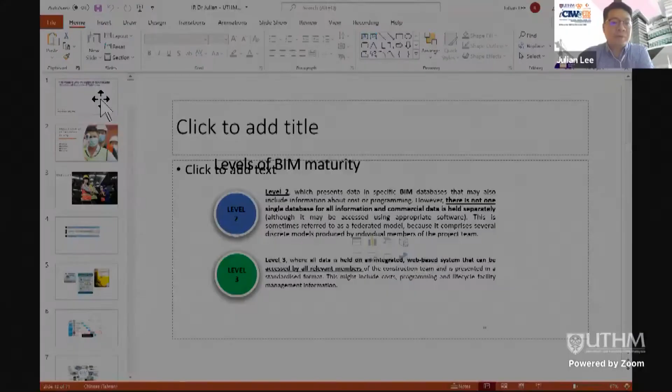Yes, yep. So I'm Julian, from New Zealand, Hong Kong, everywhere. So I'm actually quite keen on using BIM.

For my first project, not surprising you guys, my first project using BIM is in Africa. At that time I worked together with a mainland China contractor who already had the idea of using this digital thing, a 3D model, to model the building, the basement, and the E&M pipeline. But at that time I wasn't really keen because I saw a lot of things were quite simple, not mature enough. I still think at that time it was a gimmick to tell the client to give us more consultant fee. But at the end of the day, that's not the fact.

Before that, we punched through one horizontal pipe and then had to go cut an existing foundation. So you can see these digital tools can help you have a better understanding of what you are doing on site. And also all the data, all the information, can be in a centralized platform that, during the whole construction process, you can share with different stakeholders and every partner, every people can easily access the information.

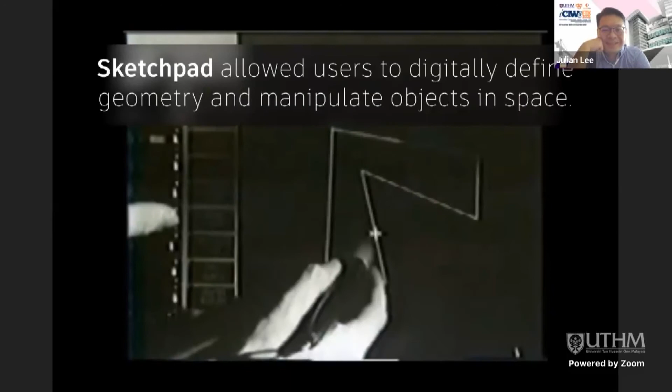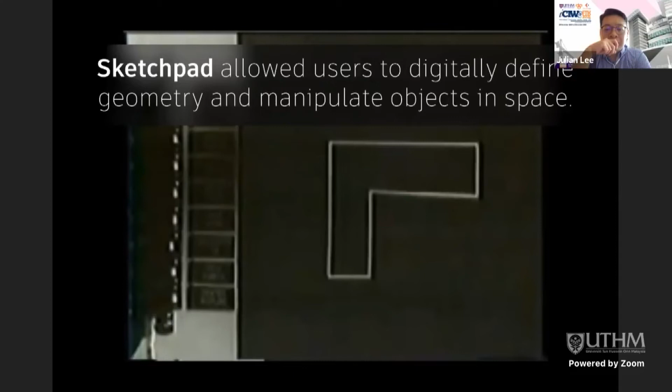The breakthrough came in 1963 when Ivan Sutherland developed Sketchpad. This rudimentary application allowed users to define geometry and manipulate objects in space with only the help of an electronic stylus on a computer screen. However, these early predecessors built models without data on functional performance characteristics, meaning that without information on how buildings work, they were rather superficial implementations.

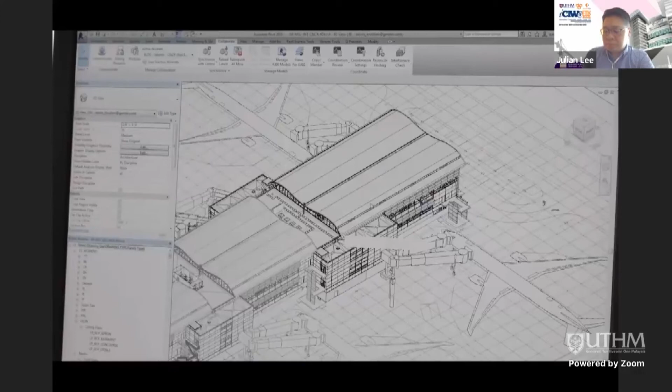In 1984, these BIM forerunners became available for use on personal computers, but it wasn't until 1986, when Robert Aish coined the phrase building modeling, that early programs were first used on large and complex projects, such as the renovation of a Heathrow Airport terminal. In 1993, the Lawrence Berkeley National Labs' development of Building Design Advisor paved the way for systems providing performance data on how buildings and their components function.

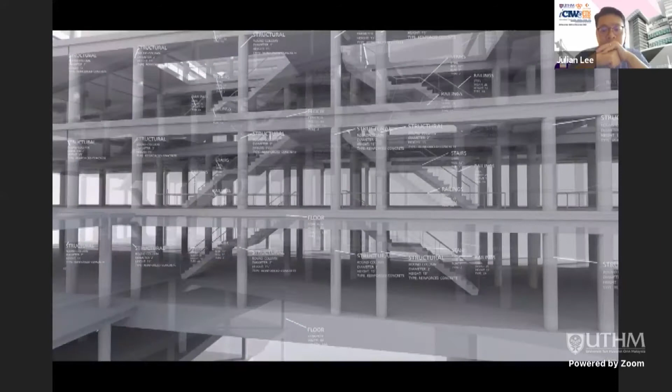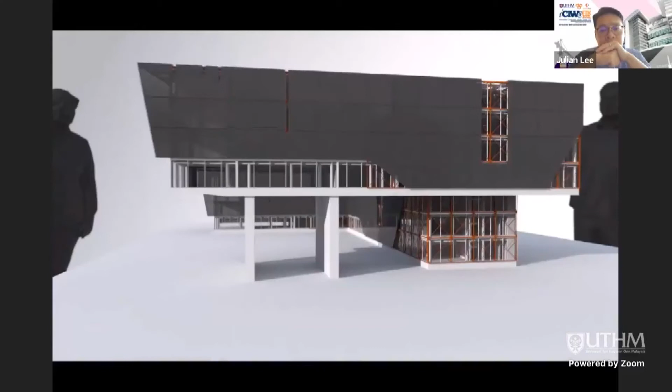By the late 1990s and early 2000s, the contemporary outline of BIM had started to crystallize. Objects and shapes had fully embedded metadata and were able to understand their relationship with each other and the building as a whole. 2004 was a huge year for BIM - for the first time, designers, builders, engineers, and owners could all work collaboratively on one centralized, dynamically updated model. For example, if a designer made a change to the model, the project's construction shopping list automatically changed too, such as the number and size of windows.

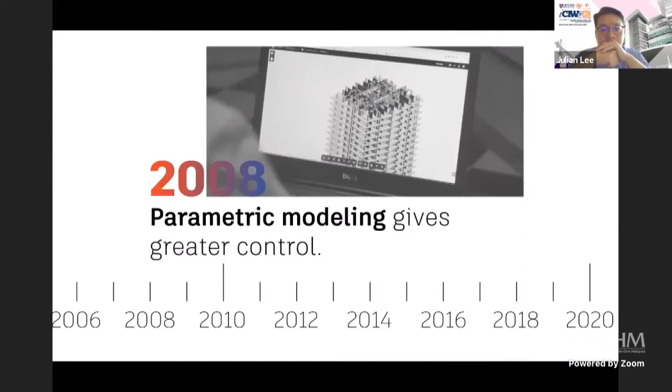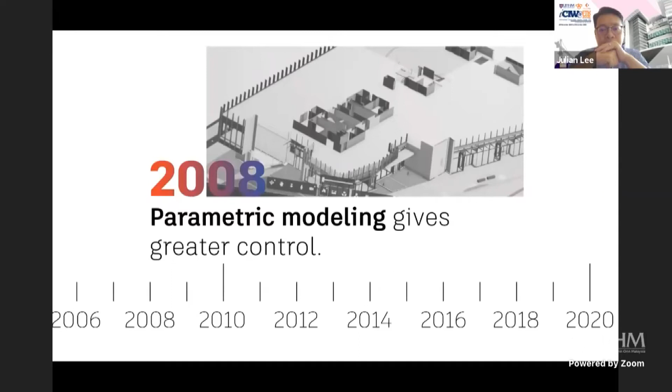2008, four years later, parametric modeling also took a step forward, with an avalanche of design outputs giving users even greater control over their project decisions. Meanwhile, laser scanning and reality capture filled BIM models with precise, abundant data, saving time in project preparations, and clash detection made it possible to automatically locate on-site clashes, such as ductwork running through beams, and prevent expensive change orders.

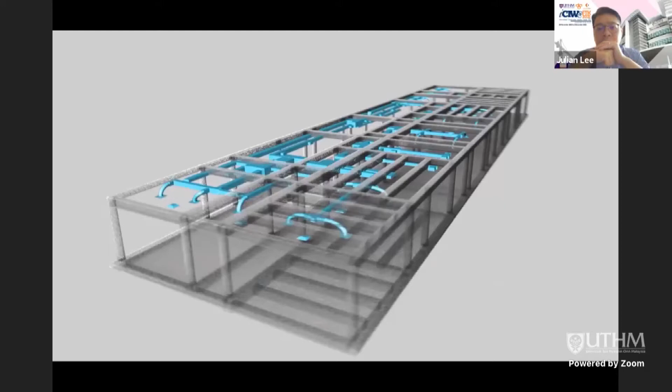With help from clash detection, engineers for the China Zun Tower in Beijing caught thousands of issues in the BIM model, reducing passive change orders by 80% compared to other similar projects. The indisputable efficiencies in time, material, and cost driven by BIM meant that in 2016, the UK became the leader in legally mandating that all public-funded building projects must use BIM. Other countries are soon following suit - by 2020, Germany is mandating BIM for all transportation projects.

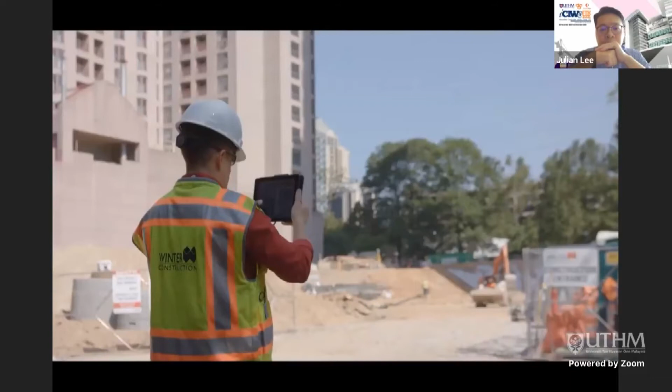With BIM now in the cloud, teams can collaborate on the same model from all over the world, providing great efficiencies. In the near future, BIM and GIS data will merge into one model, helping designers make crucial decisions based on precise geographic location. As 3D modeling technology advances and is more commercially accessible, the BIM process is becoming more and more integrated with building the wider world, promising a richer, more collaborative experience for users designing and building the spaces we live and work in.

So this is the video that I always share when I talk about BIM - I'll spend one to two minutes to show it to the audience, because it basically tells you what BIM is and how it can help us, and the life cycle process throughout the whole building or infrastructure, from the design stage until the demolition stage, that BIM can be involved in.

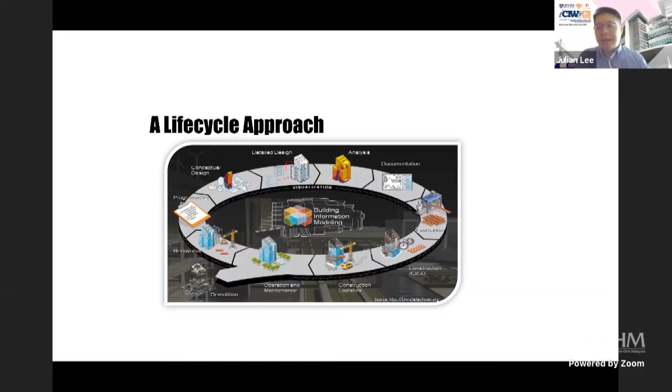BIM is not only for design - it's not only for playing around with the computer model in the design stage, but it can help us throughout the whole process, even in fabrication, construction, cost planning, facility management, and demolition at the end. So the whole process BIM can be involved in. This is one of the projects I worked on in Hong Kong at that time.

It's a tunneling project, so you can see the right-hand side is actually what we are doing on site. We have excavation, tower crane, excavator, we have everything on site. Then we try to do the BIM modeling by putting all the stuff inside the computer model. We also have RFID and real-time monitoring tools on site to know the exact location of the excavator, to know exactly what the construction activities are, and then we can plan ahead.

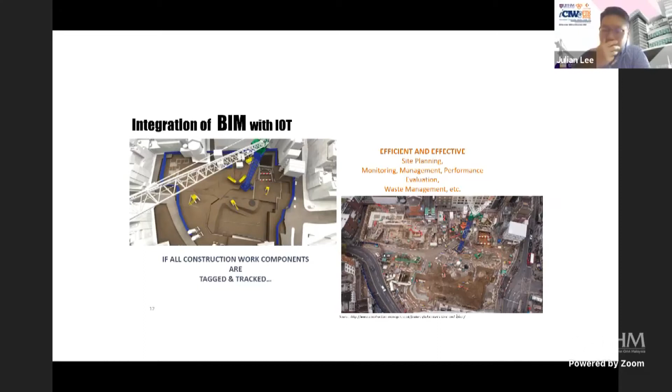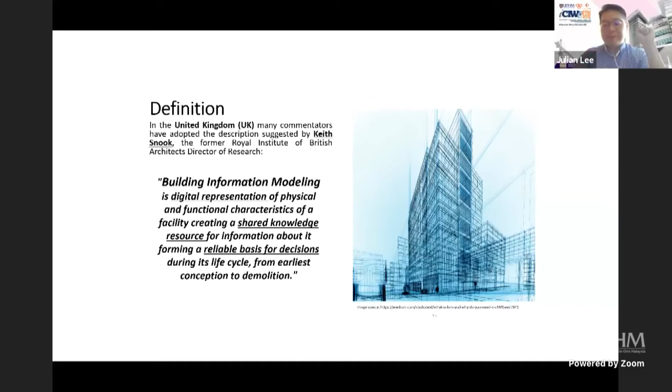By the definition in UK, basically as I mentioned, BIM, everyone thinks building, but we try to make it more generic in the global perspective, since different countries have different corporate practice, to make it clearer to people what BIM is. So basically BIM, by this UK definition I like, is a digital representation of a physical and functional characteristic of a facility, creating a shared knowledge resource. The information about it will form a reliable basis for decision making during the whole life cycle, from earliest concept to demolition. So this summarizes that BIM is not only for design, but throughout the whole life cycle process. It's a sharing platform, a digital representation of a physical matter.

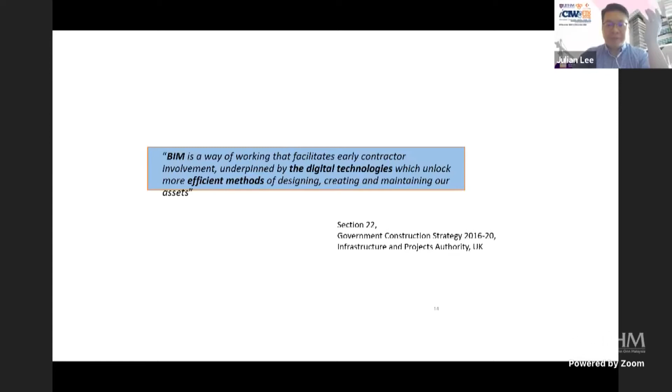Some of the UK and overseas strategy or policy reports keep saying that using BIM can improve our efficiency and productivity. And the information needs to be shared. You cannot just do BIM in your cave. You cannot just tell people, hey, today I am doing BIM in my lab and I don't share the information with other people. Then this is not BIM.

BIM is about sharing information, but the sharing of information is a bit complicated, because in a construction project you have a lot of different people - architect, MEP engineer, C&S engineer, contractor. How can I share my information with other people so easily? So we need a platform, something in the cloud, a common database where people can store all the information.

But you can imagine that if all the information comes in, just like what you're doing in Google now - wow, a lot of information, which one is the correct one, which one can you make use of. Sometimes it's very confusing, right? So right now we're also setting some game rules about who should be the one to put in the information for that particular discipline, and who should have the authority to amend and approve the information for others to make use of. So we need to set up these game rules in the BIM process to make sure no one can just easily come in and stir the whole thing up and mess up the information.

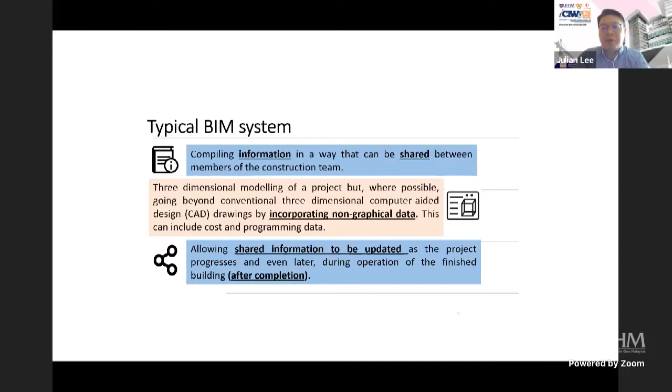If you want to have a successful BIM project, you have to set the rules in such a way that people won't easily destroy everything in your system. A lot of qualification is needed at the project level, the company level, the personnel level - we have a lot of different accreditations. Just like myself, I am a chartered engineer, the UK civil engineering institution accredits myself as a chartered engineer, and the New Zealand professional engineer board also accredits myself as a PE there.

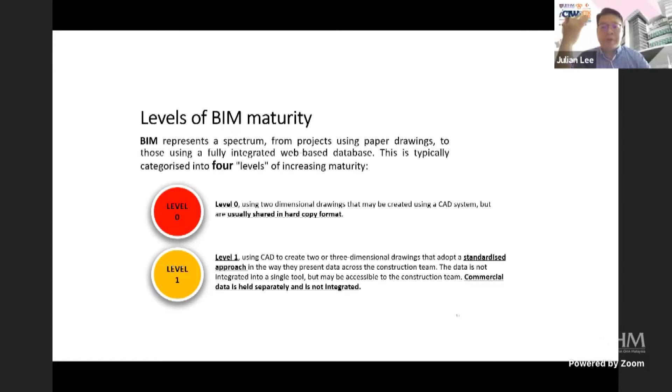So BIM also has different accredited systems to benchmark the project, whether it's level 0, level 1, level 2, level 3, and they have different thresholds and criteria. I'm very happy that in Hong Kong, when I worked at the Construction Industry Council, we established a qualification called BIM Manager and BIM Coordinator for projects, which means that for public works projects, government projects, if you actually want to get involved, you have to be accredited with the qualification by CIC Hong Kong as a BIM Manager or BIM Coordinator.

To some extent, it's a very good opportunity for young people to set a target - when you want to come into the BIM industry, it's just like when I came into the engineering industry, my ultimate goal was to become a chartered engineer, right? So if you come into the BIM industry, you can become a BIM manager or BIM coordinator, accredited by different authorities. In Malaysia, I'm quite sure CIDB is doing similar things to promote BIM by putting in those qualifications. And as I mentioned, BIM level 1, 2, 3 - at each level in the project, there should be a certain amount of different BIM managers and BIM coordinators inside that level.

So all things are tied together. If you don't have the BIM manager, the BIM coordinator - I mean the people - how can you claim that your project is BIM level 2 or level 3, right?

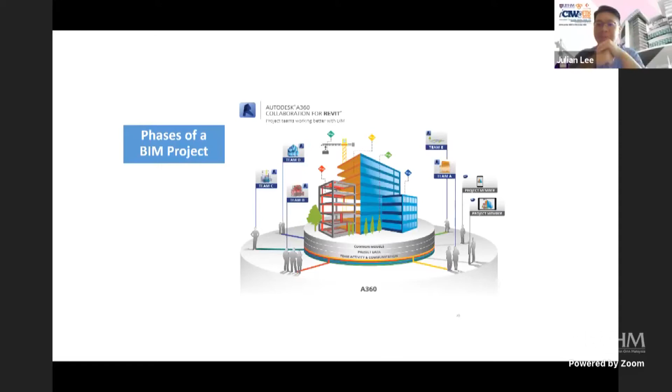So I keep telling my friends at the uni, basically don't worry about the software, just teach the fundamentals. When people come into the industry, they will have a lot of different software that they can make use of. And AI, all these things, like the video also mentioned.

Analysis things that we can have different options by using BIM, by using analytical tools that can do a parametric study and give you a lot of options.

I've been involved in a lot of different deep excavation works. And in deep excavation, sometimes the shoring and the level, all this thing is a mess on site - we keep changing. And the platform, temporary platform, how we put the excavator on top of the platform, all this location. AI can help already. AI can already help us give a lot of different options, and by putting it into the BIM, before we really excavate, we already understand which should be the best option that we can make use of.

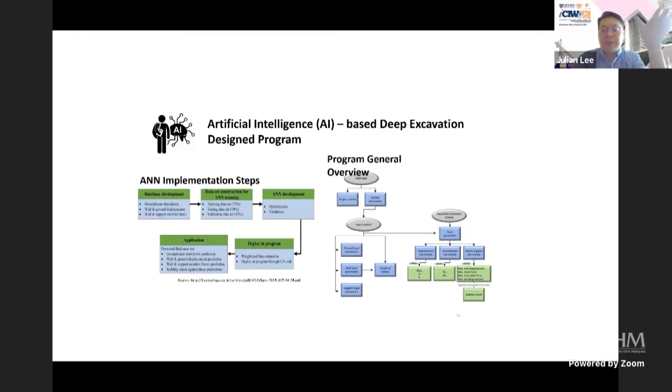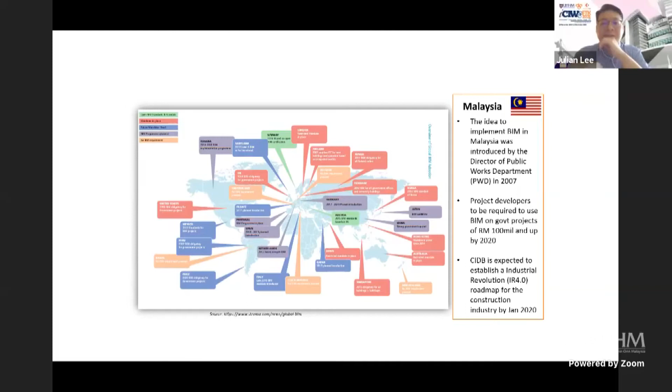And in New Zealand, when I started my business there, I invited my good friend from Stanford, Dr. Calvin, to come over and tell the Kiwis how this BIM scoring concept can help them benchmark themselves in BIM capability.

Dr. Kam also mentioned the common IFC file format, because different models from Revit, Bentley, ArchiCAD and other things - how we convert the whole thing into a common platform that everyone can easily make use of as shared information. Some of the hurdles I can see using BIM with different software vendors is the format is not tidy, so we cannot easily transfer the information. Just like if you have a PDF file, how you can transfer it into a Word file - similar to these things.

If you get into the BIM industry, you have to understand that everything needs to be shared with people. It's a shared platform. I cannot just do something that only my group of people know. I need to make sure that other groups can make use of my information.

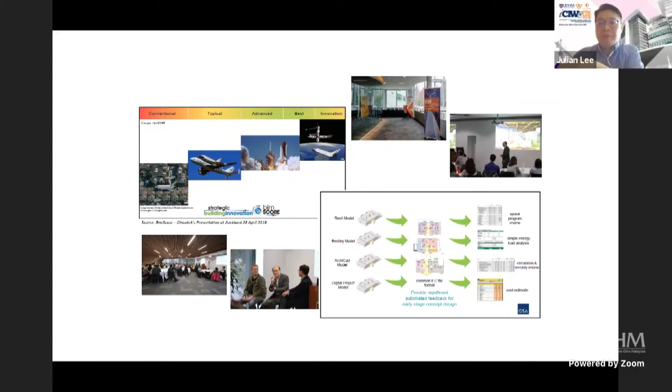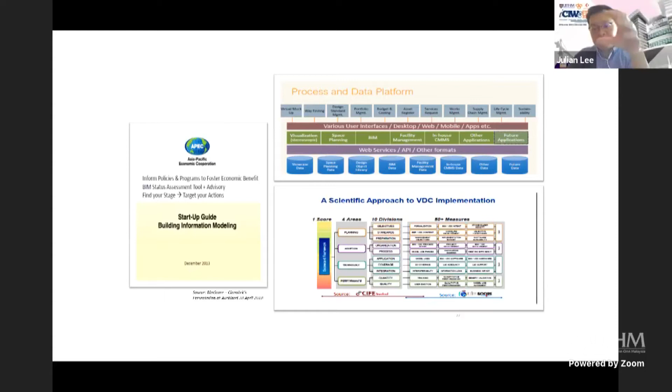The BIM score benchmarks different projects, different countries, and they develop guidelines on how we can go from BIM to virtual design construction. Different governments like UK, like Hong Kong, do a lot of awareness surveys. I have some feeling Malaysia is doing something similar, looking at their BIM competency level and the awareness level of different industry players, whether they know BIM should be the way. I'm quite sure CIDB, my BIM center friend, they're doing the same things.

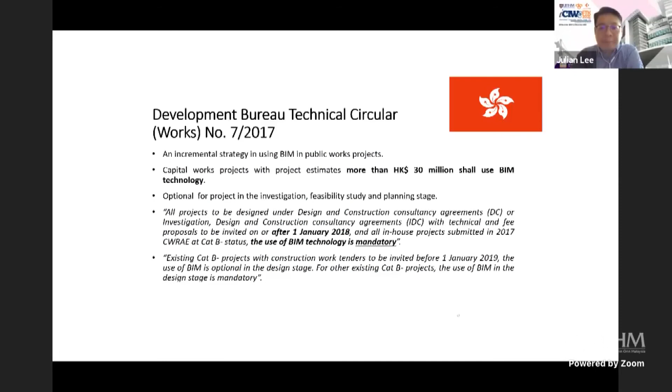Going back a few years ago, when I went back to Hong Kong and saw this policy address, the government policy address, I was very happy because they mentioned quite explicitly that in projects we need BIM, and there's money to support BIM application. For each project, if you use BIM and those digital methods to improve productivity, you can get some funding from the government.

So you can see top-down is one method and bottom-up is another method. I won't say only top-down can make a successful story for BIM. It should be a combination of top-down and bottom-up.

Bottom-up is just like what the university is doing. You train up the BIM people, you train up good students for us so that in the industry they're equipped with the knowledge. Then when the top-down money and projects come, we have the supply from the university, the students coming in, and then we can make the momentum. Imagine if I only have money and don't have people, how can I do it?

The pandemic made me rethink one thing, because in the old days, people could travel so easily and digital information was also so easy to share. So quite often I had my drafter, my BIM modeler in the Philippines, mainland China, in Malaysia, helping me on a project in the UK, perhaps. Easy, right? But now, because it's so difficult to travel around, using video conferencing is still manageable.

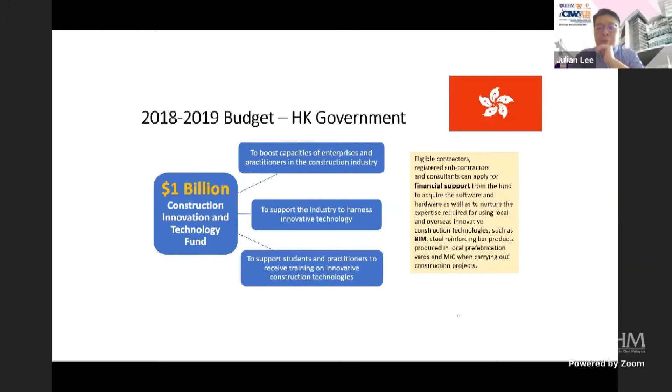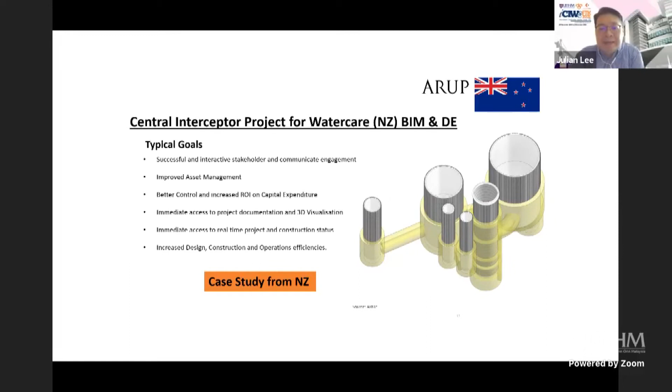So this is some of my New Zealand project, when I worked with Arup doing BIM models by adopting some English project methods. They also mentioned the whole thing - data analysis, design, documentation, and visualization - and how the whole thing ties together.

I don't want to go too deep here because I know students may not understand this whole process. But just to give you a basic understanding: doing BIM is not only playing around with the software. It's data, documentation, analysis process. It's the process knowledge that you have to equip yourself with.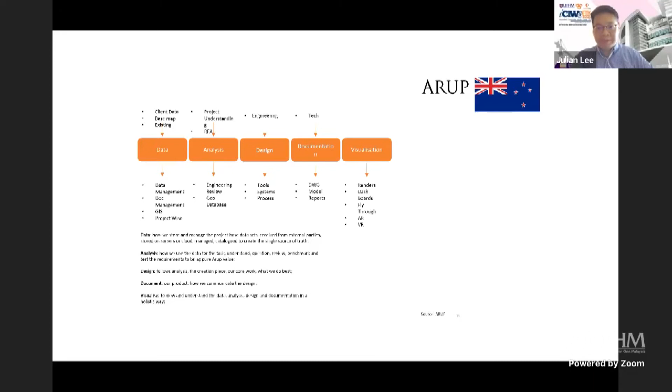Clash detection is how you make sure, by using BIM, that the clashes that we quite often encounter on the construction site can be avoided. We try to use BIM to reduce the chance of having all those clashes.

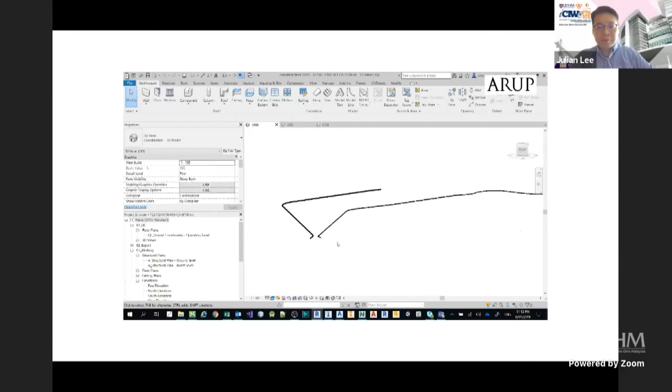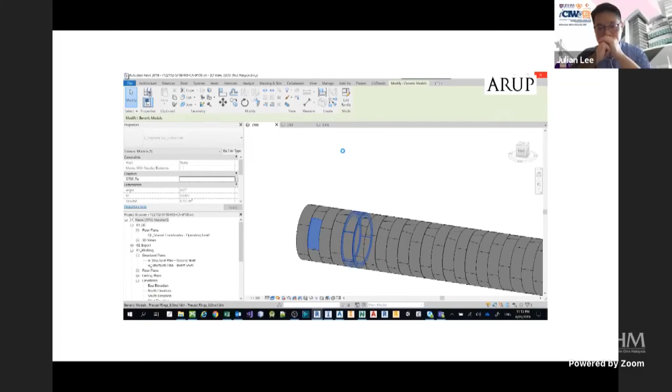So again, I'll show some video for you on the tunnel segment, using the BIM Revit tool. It's easy to use BIM in the analysis to help you formulate your design. The main purpose is to make ourselves have a more effective way to do the design.

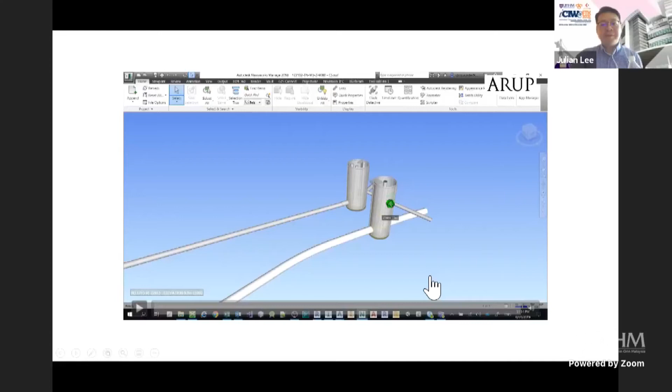This one is interesting, because we can also tie the whole thing with the GIS model, and also look at different programs and the timing.

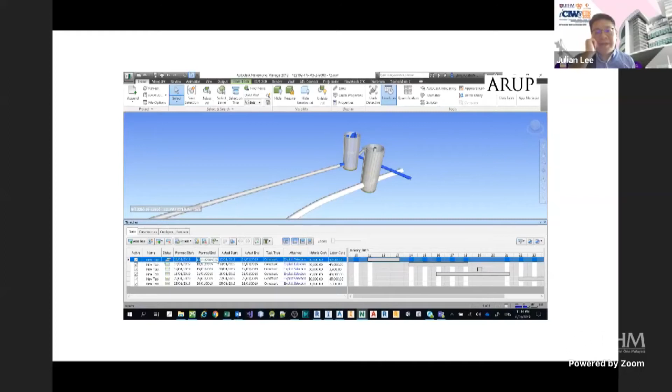So don't only think that BIM is something for architects only, or something for engineers only. It's also something for quantity surveyors. They look at the whole process, and can easily calculate the quantity and monitor the construction timing.

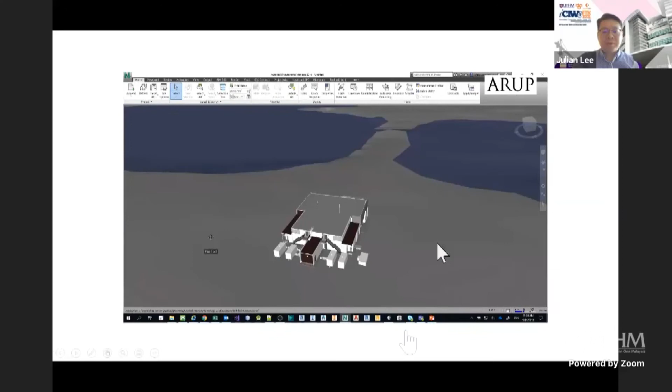And also this ties with geographical information, so you understand, okay, if I have this pipeline coming over here, what is the impact to the existing pipeline in the city?

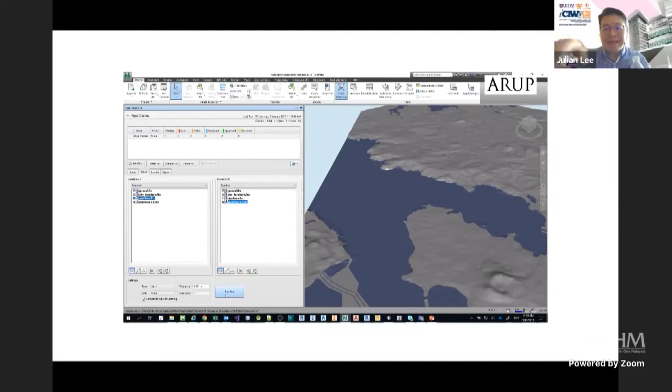It comes to another big concern: who should be the one that owns this information? Government, consultant, contractor, or who should be the one? It's a very big debate how these things can be properly managed.

Just like in this pandemic time, who should be the one that can manage the information for every single person that comes into your country, comes into my country - it's quite a big argument, right?

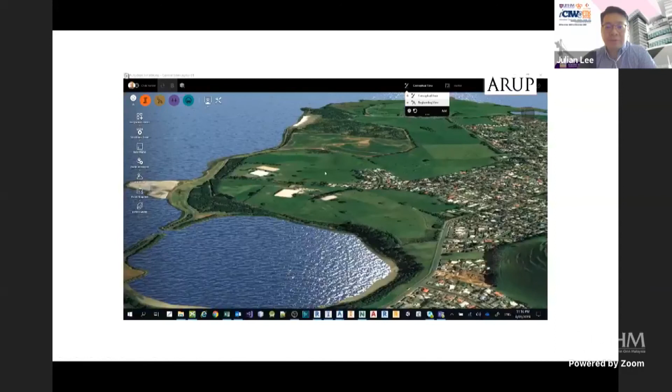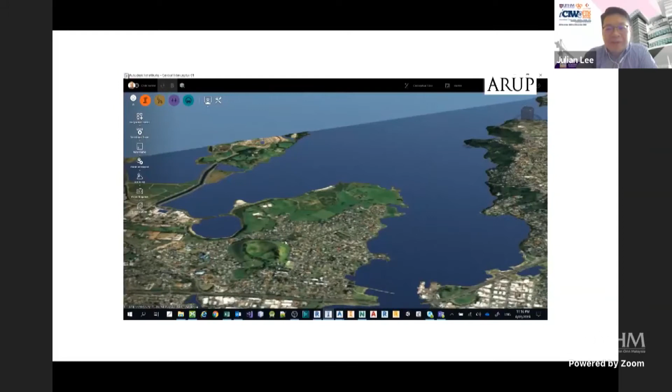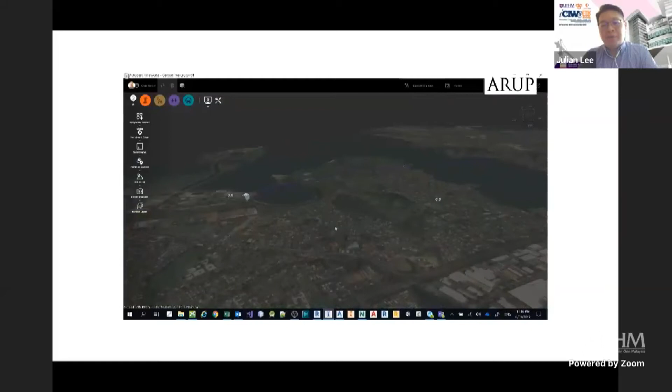This is Auckland. So if you guys are interested in coming to Auckland, you can see all these nice places. I live in one of the condos here. So when we build up a new project, we can easily tie the BIM model with this existing information, and we can see how those things are tied with the existing building, landscape, all those things.

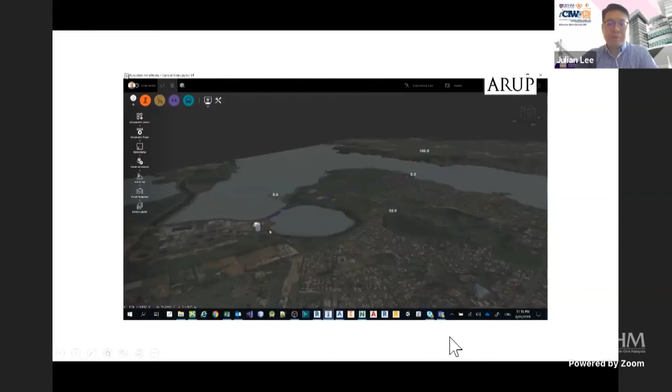Sorry. You just mentioned who will own the data, is it? Is it the consultant, or is it the government?

Yeah, so in this kind of case, it's always very controversial. So normally, how do you all deal with it?

I would say at the end of the day, whoever is the client should be the one who owns the data. If the client is from government, it should be the government. But for private development, if we talk about only a building, not actually tied with other things, that should be the developer itself. But if the whole thing is tied, for example, to an MRT station, and all the drainage things are tied back to the central drainage system, that should be the government and the developer.

But I always talk to the consultant - hey, I think at the end of the day, even though you are the one developing all these things, I don't really think you are the owner. You should be the one helping the owner, the client, to deal with the information. So you can't just use that information in your other project if you don't have permission from the client to allow you to use the data.

So this part is quite controversial, because I also talked to my professor friend from the law department in Hong Kong. He is also very keen on BIM. He also tells me it's very controversial who should be the one to make use of the information without any restriction.

Even government may have restrictions, because maybe the information is owned by the developer and the government together, but the data is stored in the government system. Whether the government can make use of the developer's information in their other developments, I don't think it's easy for them to get permission, unless the government sets up some rules that at the beginning, everyone coming in grants the access, grants the permission to make use of the information. So it's all about contractual relationship, all about the legal framework.

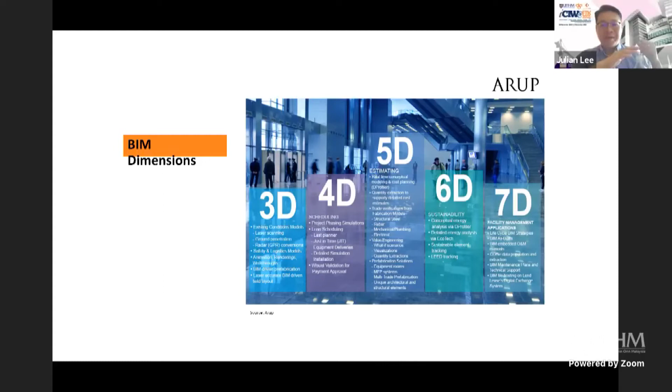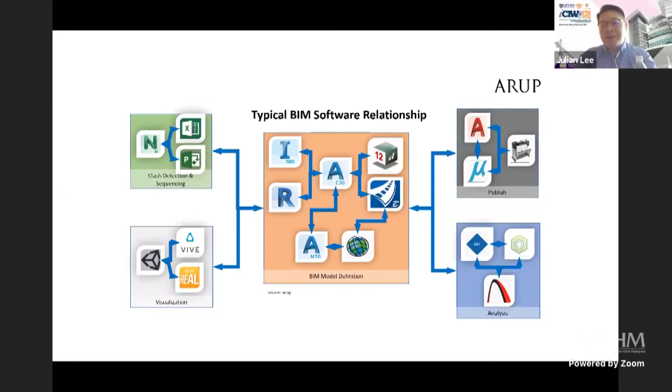So the 3D, 4D, even 7D, a lot of dimensions. I always say people keep saying a lot of dimensions, and that's okay - just tell people that BIM is actually about sharing information until construction, cost, time, and maintenance. That's all. So the solution software is how the whole thing ties together: visualization, clash detection, production of the document, analysis.

And my friend Chris from Arup, he actually quite likes to tie the whole thing with his mobile phone - okay, this is AR.

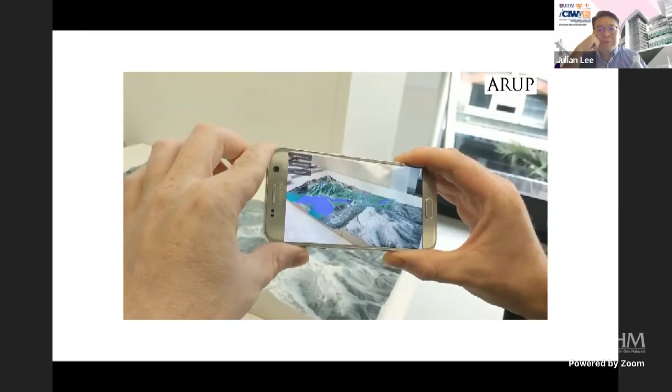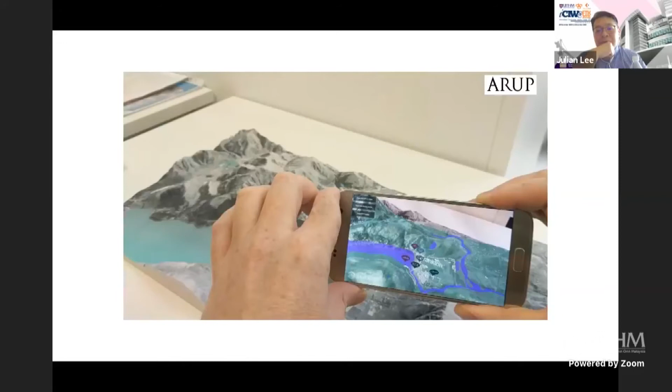Wow, I hope we've done this well. It's quite impressive - the first time I saw this was back in 2018. I just want to show how, as it rotates, the text and icons rotate with the view. My God, this is cool.

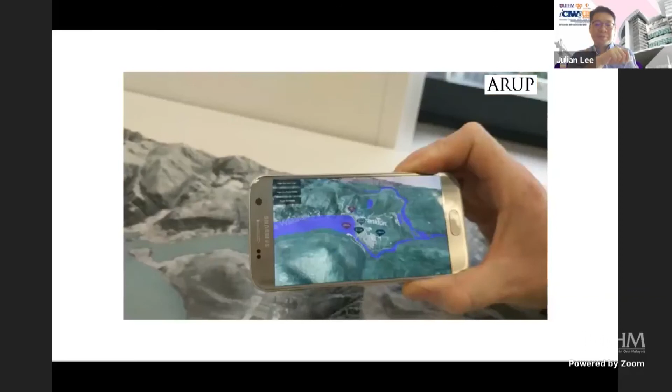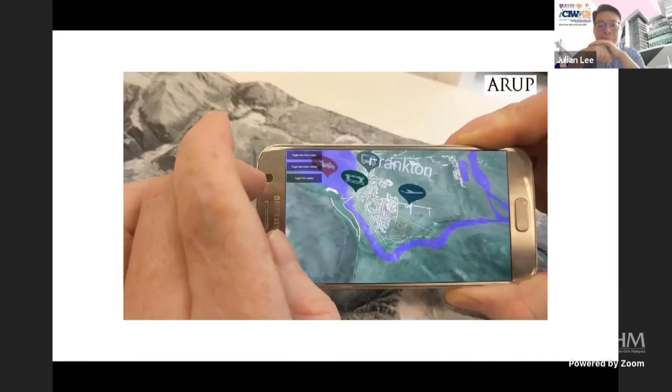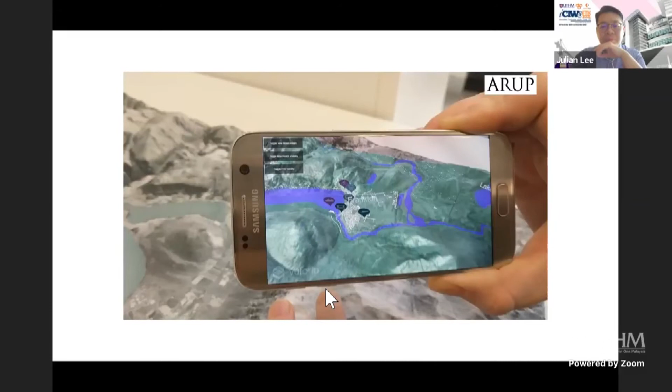Okay, now we're going to zoom into this area, and I'll show that when I toggle the button, it starts glowing. We can toggle that off again, switch areas on and off, and also switch the POIs on and off. As we move this around, it sticks with the model, and we can point at things.

So yeah, that's kind of all I wanted to record. Quite impressive, right?

So a lot of all this AR, VR, all things tied with BIM. And this gentleman right now is still in New Zealand - I had a short chat with him three weeks ago. He asked me when I can come back to New Zealand. I said, I really don't know, friend, but when the border opens, I will try to come back home.

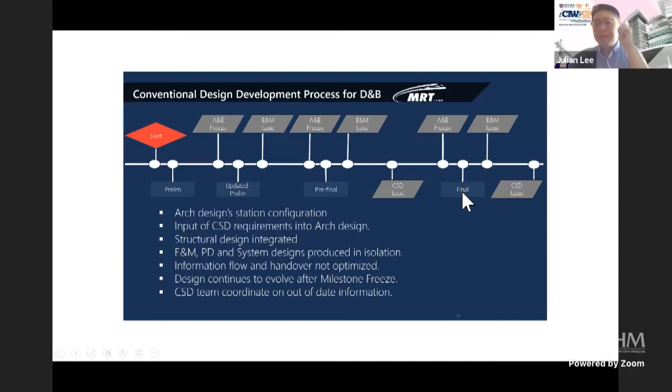So another good friend of mine doing MRT at that time also has very good process definitions. Using BIM, what is the difference with the conventional D&B contract? In the conventional D&B contract, you see a lot of milestones - the architectural layout has to be frozen, has to be visualized, from the prelim, update prelim, pre-final, until final, and the combined services drawing comes in. You have a lot of milestone days, right? Because if you don't achieve that milestone, how can you come to the other milestone?

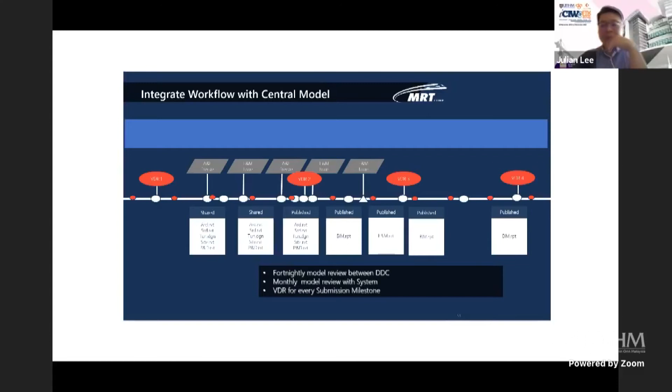But in the BIM process, the central model is actually a dynamic process where the whole design throughout the whole design process will be updated from time to time, and all the people are sharing the information together. So the VDR workshop is very crucial - all the people will be sitting together. The virtual design review workshop means everyone has to sit together to make sure the model is fine, the information is fine, then move to the next one. All these people are so happy to achieve level 2.

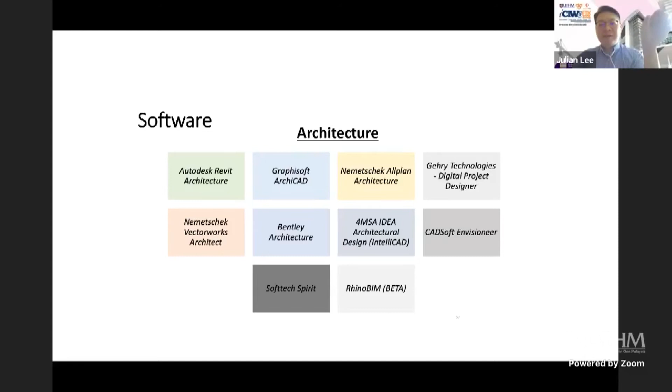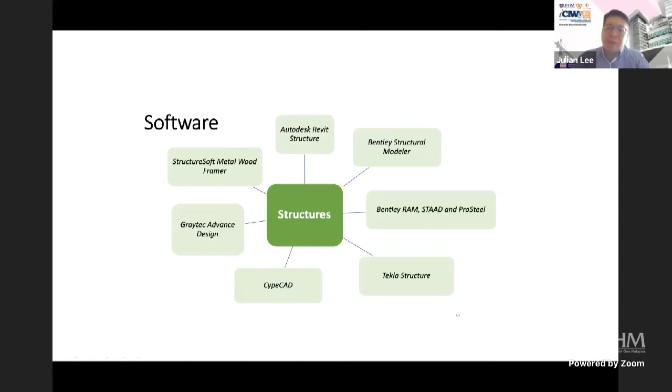Okay, because I'm a bit running out of time, I'll talk more about the software. As I mentioned, no worry, no need to study all this software. If you study all this software, I think you'd already spend 20 years. So don't feel so scared about whether you need to learn Tekla, Revit and Bentley all together. As I mentioned, no need - on the job training, you will equip yourself with the knowledge.

So I will say right now we have the opportunity, and we need to make ourselves clear that this is the future, the way the construction industry will be going ahead. We can't rely on the old style method because the demand, the effectiveness of the project, the target and the expectation of the project are much higher now. So we have to use digitalization - BIM should be the one.

But how we define the roles and responsibilities of different parties inside the BIM process - who should be the authorized user, who should be the one that can define the details - all these things we need to make clear to the project team members. And also the cyber security issue - how do you make sure your data on the cloud platform won't be easily hacked by people, with all your project information leaking out.

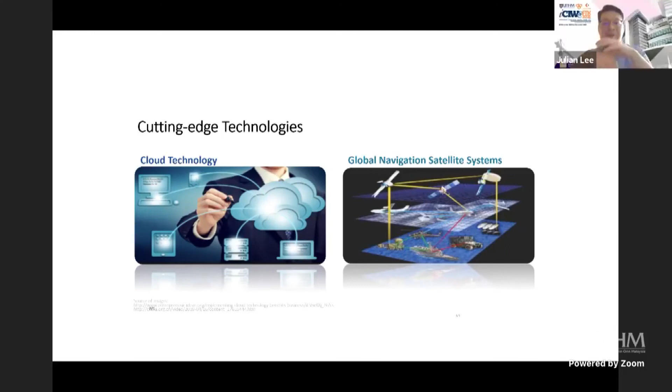So a lot of standard ISO standards and different security methods were already in place in the market, for how to protect our CDE, the common data environment, all this information. Another good thing is cloud technology, 5G, and navigation satellite systems - all this is helping us move our industry not only in BIM, VR, AR, but also tie with the machine, tie with the process.

So I will conclude my presentation by saying this statement. BIM is a process, and this is about process engineering - BIM is only one component. We have a lot of different things coming in, smart machines, GIS, and many other things come together. You can see the opportunities BIM can be crossed over with all this different technology. Thank you very much.

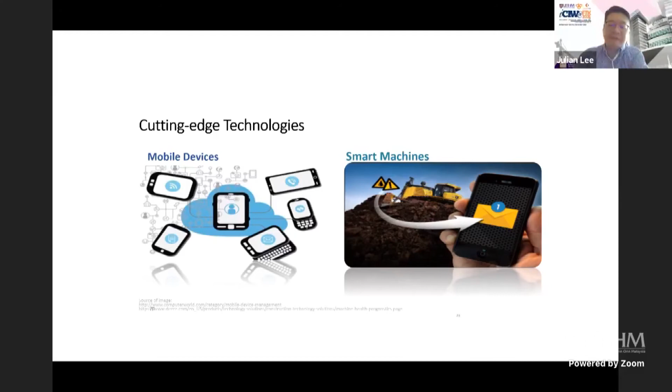Just in time, Dr. Julian. Oh, thank you, that was like a super fast bullet train. Actually the slides are so informative.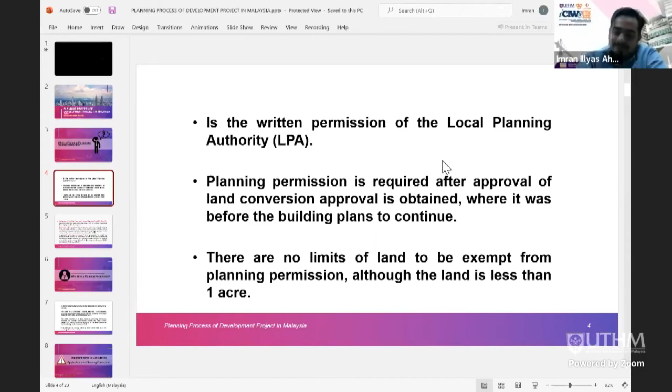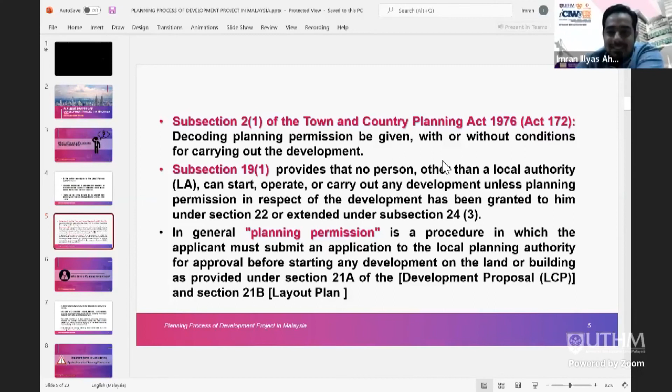So basically this is a planning requirement. I think you can see this later. I want to introduce a bit about this, and I'll explain more about how we are going to do the work.

For this item, normally I go to item number 3, for areas outside of local authority jurisdiction. This item says that if the area is not under the majlis (council), you need to go to the Jabatan Perancang Bandar (Town Planning Department). At this stage, I think the submission is not so difficult.

Then the next item - the decision is usually made by the local authority through a meeting of the relevant departments and district. During that meeting, normally around 27 departments will join to decide what they need, their requirements.

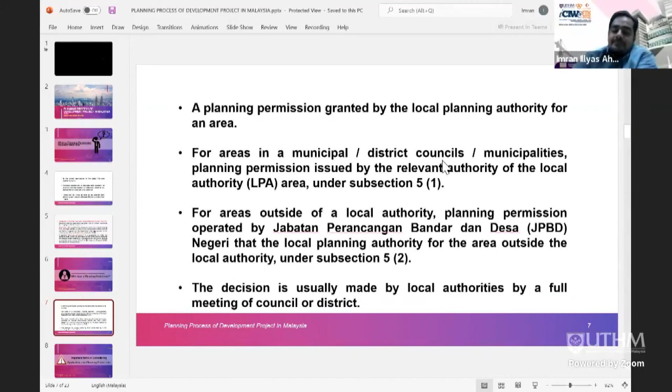Important items to consider in the planning application.

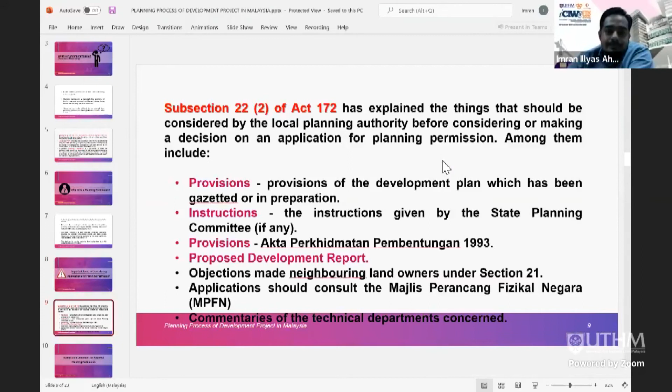I'll go through the submission documents for approval of planning permission. Normally for town planning, let's say 500 acres - what happens is the planner will come in. Once the planner comes in, they will appoint us, C&S, M&E and surveyors, to identify the requirements.

So what we need to do is prepare an earthwork report and drawing, also a drainage report and drawing, sewerage report and drawing, water demand, and traffic impact assessment.

At this stage, we normally check the C&S requirements of that area. For the drainage (saliran), we need to divide the catchment and identify the existing stream. So at the KM stage, we have to identify all these items before going into detail.

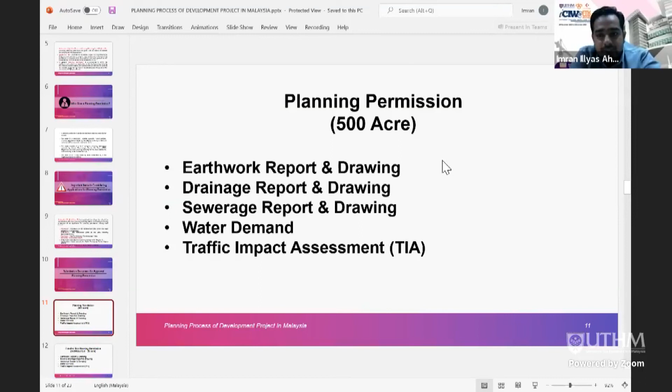So after you go through this KM for the overall planning, then you go for the next one - construction planning permission, which in Malay we call kebenaran merancang pembinaan. After you subdivide the overall one, then you go for this individual stage.

At the overall stage, we already confirmed the water tank, the sewerage treatment plant, and the flow - everything. So at this stage, it'll go a bit easier compared to the previous one, but the scope is smaller. The items you need to prepare, I think, are the same as previously.

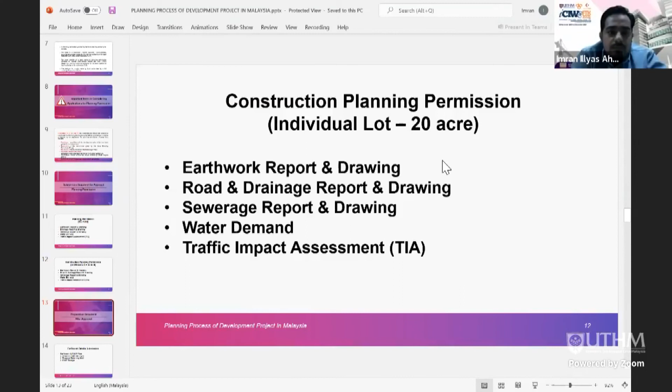So I go to the preparation. Once your KM is approved, you go for KM pembinaan, the one I already informed previously. The next one is after that is approved, then you can go for this detailed submission.

Normally I start with earthwork because that is the first item required by the contractor. During that stage of work, we will design the platform level and propose retaining wall. We normally follow the original survey and won't go too far compared to the original ground level, because if we go beyond that, we may have a lot of problems.

Also ESCP design. Basically ESCP, you need to submit to JPS. First you need to submit to Majlis, and also you need to get consent from JPS. Majlis will only approve once you get JPS consent. This also depends on the project. If your project is big, let's say more than 50 acres, then you need to go for detailed ESCP submission. That one is the other way around.

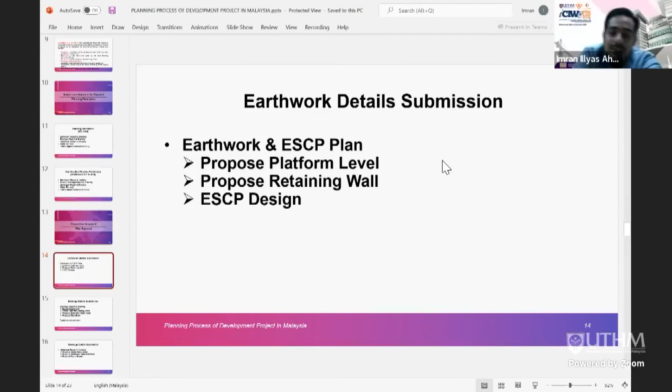So I go to the next one, drainage detailed submission. This is also known as saliran. Normally we just call it saliran submission, because it's near the drainage and with road and drainage, that's why we call it saliran.

At this stage, what we need to do is design the catchment and check the topo. I did give some info about Jupem - from here you can identify the topo. Last time I did it using a hard copy, and topo was very difficult, but nowadays you have it online. This is very useful - once later you need to design, then you know what this is.

After you identify your catchment and your external drain, everything, only then can you propose detention pond or OSD. Normally less than 5 hectares, only the authority allows us to use OSD. With OSD you don't need to provide what we call reserve area - you just put it below the road, no need for reserve. But a detention pond, you need reserve.

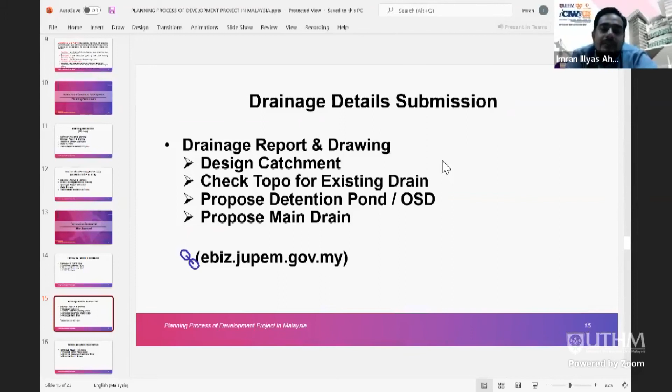After that's complete, then you go for the next one - sewerage detail system submission. At the early stage you already identify the sewerage treatment plant, how big you need it, and the pump house. Normally we need a pump house because of the OGL, so you cannot divert the flow - you need to provide the pump house.

So all this we need to identify already during KM. Anything we miss, then at the end it becomes very difficult - a lot of things will come out, funny things.

For the sewerage, normally you need to submit the overall planning. Once the overall is done, then you can go for the individual one, PDC 1 and then PDC 2, and then you jump straight away to PDC 6, 7 and 8. Then you can get the sokongan.

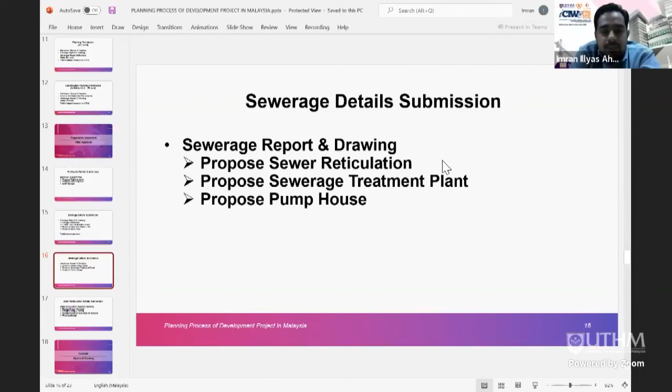So the next one is the water reticulation. Normally for the water, we will get supply from, like in JB, SAJ. They will inform us where the main water source is. From there we will identify our reservoir location, and then either we need elevated or ground type, subject to the water pressure.

Once we confirm the reservoir location and the type of reservoir, then we identify it inside the KM layout. At this stage you also need to check whether you need a pump or not. If you need a pump, then you need to provide bigger space for that reservoir reserve. And then you need to check your rising main, falling main, pipe size - the bigger your pipe is, the more you need to also provide the service road.

Then you go for the overall concept. After all this is complete, you can call for tender, start work on site, and begin the work. For the individual work, you need to conduct the phasing design, individual design submission - all this approval. After you get all this approval, I'll show you the example.

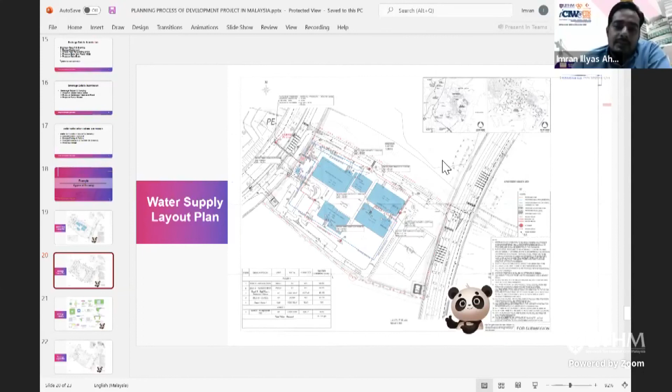So the next one is sewerage. The flow is more or less the same compared to others. You need to get it approved, construct, get it inspected, and then get the sokongan.

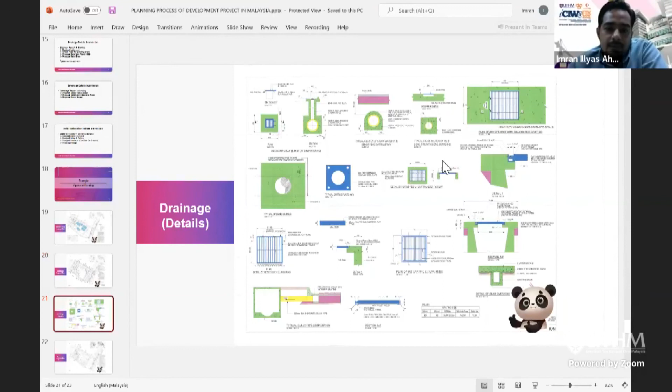Okay, these are the details, and the last one is sewerage. This one is only for individual land, so it's not connected to the STP. For the STP, that one we will refer to KML.

Okay, so basically for every planning, I think the C&S part is more challenging, as we need to identify it at the earlier stage. Anything we miss is very hard for us to fix at the construction stage, compared to M&E.

So if you compare to M&E, I think their side is more straightforward. They just need to provide the substation. So the anchor of KML I think is C&S. After KML is complete, then KMP, then only the architect comes in.

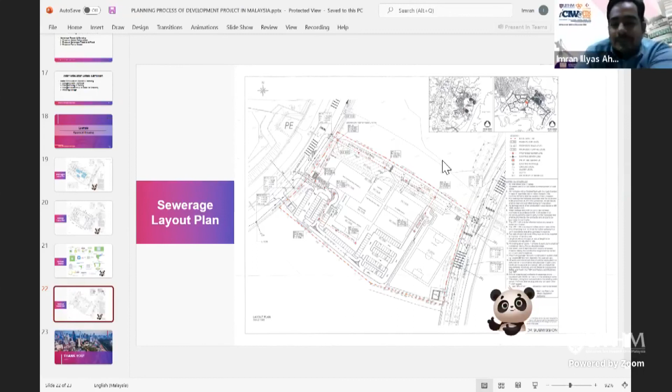So I just want to inform you that during the submission, you need to go for online submission. I think that one is easy -- once you find it, you can do it like logging into your Facebook. So I think that's all from my side.

If you have anything you want to ask, I'll try to answer based on my experience. Right, thank you, Mr. Imran.

Wow, that's a lot of things summarized in a few slides, but the process is pretty long and tedious, right? There's a lot of documentation. Maybe you can share a little bit -- is there a situation where you submitted something and it was not approved, and all the process you had to deal with? Do you mind sharing more, since you had a few projects you were in charge of?

Oh okay, so I think I have one. Recently, one project at Kota Tinggi. At that stage, I think our scope was very easy -- we just needed to provide the ACDC.

However, we encountered at that site the PRPC Petronas raw water pipe, so our approval at that stage could not get approved. Then we needed to knock on their door to get approval. I think it was a long process -- that item made us wait around one year. We needed to identify them, check, refer to their spec, provide the design, and check with their comments on everything, and come back. Then only we got the approval.